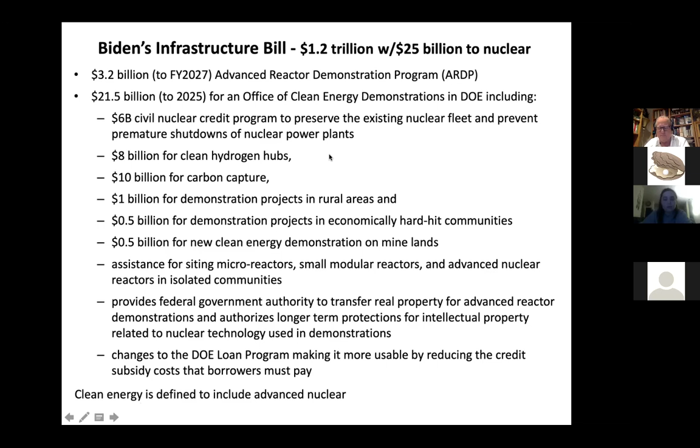So there is a push because all of the leading climate change scientists like Jim Hansen, Kerry Emanuel on down say we will not solve the climate issue at all without a vast expansion of nuclear power. So just forget it. If you're anti-nuke, you're not serious, you're not doing your homework, and you're just listening to nonsense. Because if we don't, then we're screwed. So that's kind of where that stands. Now, the nice thing about this infrastructure bill is that it defines advanced nuclear in the clean energy category. And that's been a fight because the anti-nuclear people do not want nuclear to be categorized as clean, even though it's cleaner than almost anything else.

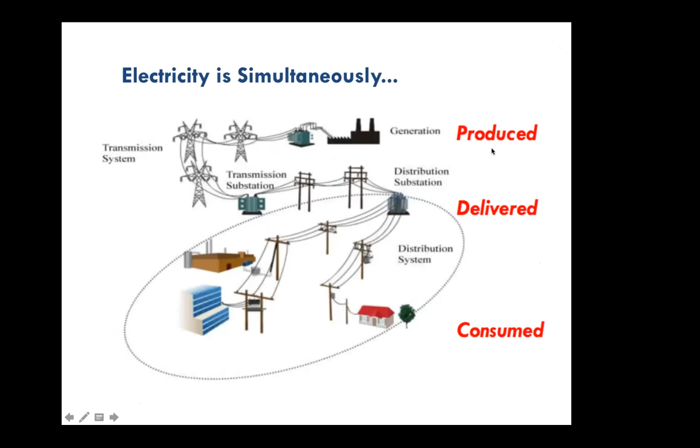Okay, now, in order to have a grid, okay, so we have an electric grid in this country. We have actually several pieces that are slightly connected. Electricity has to be simultaneous. It's produced, it's delivered, and it's consumed. If you produce more than you consume, you start blowing transformers, the big ones, the ones that cost $400 million. If you consume more than you produce, you start having rolling blackouts. So neither of those are good.

And so the grid operators, the independent system operators or the regional transmission operators, like BPA, the Bonneville Power Administration here in Washington State, they constantly monitor the grid and they plan as far ahead in time as they can to make sure this is all simultaneous. Otherwise, they're going to have problems. And we've never had problems in the Pacific Northwest until now, because we have so much hydroelectric. Now, just remember that, it has to be simultaneously balanced at all times.

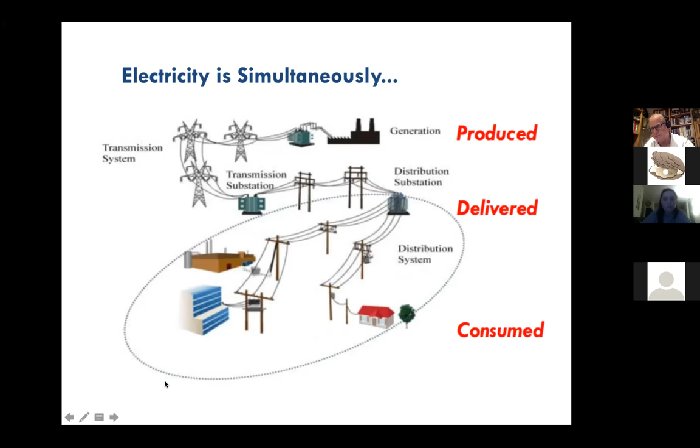Then there's something called a capacity factor. And I'm curious to see how many people know what capacity factor is. Capacity factor is the annual average percent of the maximum output possible that actually is produced, okay? So that means nuclear just doesn't shut down except to refuel every 2 years. So it's a very, very high capacity factor. A 1,200 megawatt nuclear reactor like the one near the Hanford site, Columbia Generating Station, produces 1,207 megawatts 93% of the time. And that's pretty good. You can depend on it.

Natural gas only runs about 56% of the time. And there's reasons for that. It could do more if you wanted to, but it's expensive, contrary to what you think. Coal only runs about 50% of the time. Hydro about 40% of the time, because there's so much demand on the water in the hydro system. It's not just to produce power, it's for flood control, for irrigation, for transportation. So there's a whole bunch of reasons the water is not only producing power in hydro.

Wind is about 35% of the time, but it's very dependent on where you live, where they are. And solar is about 25% of the time. Now, in Eastern Washington, where all these wind turbines have been built in the last several years, the capacity factor is only 27%, in Washington State. In Tornado Alley, in the mid part of the country, where obviously by the name they get a lot of wind, the capacity factor for wind is 45% of the time.

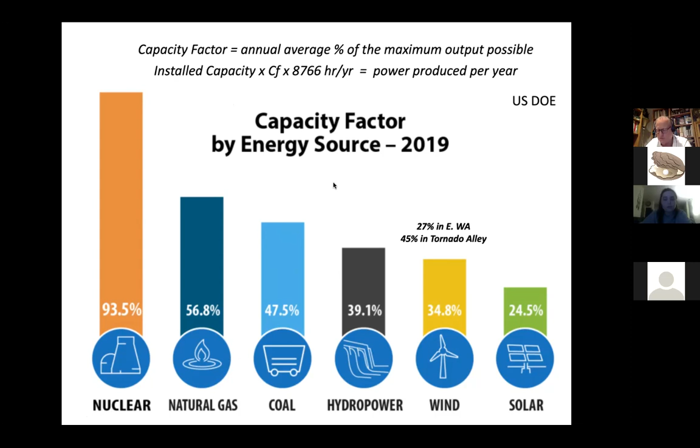Now, if you have the installed capacity, so you build a 1 megawatt wind turbine, then you multiply that by the capacity factor, so 0.348 times 8766 hours per year, and that gives you the amount of power produced per year by that unit. Now, installed capacity doesn't mean very much because you need to know what the capacity factor is. And the amount of power it could produce if the sun shone 24 hours a day or the wind blew 24 hours a day doesn't matter. It only matters what it actually produces per year.

So if you compare something like a 1,000 megawatt nuclear power plant with a capacity factor of over 90%, it produces this much, 8 billion kilowatt hours a year, or 8 million megawatt hours a year. That's just what it does. A little bit more, a little bit less, depending on what's going on that year, but it's pretty much about 8 million megawatt hours a year. Wind, same installed capacity, only produces 2 million. So it's a little under a quarter.

That's important because when you say you're installing 1,000 megawatts, you're not really installing 1,000 megawatts of wind. You're kind of installing 1,000 megawatts of nuclear, but you're only installing 270 megawatts of wind. So when the state legislature or the power companies talk about we need to install 10 gigawatts in the next 5 years, you need to remember you have to multiply that by the capacity factor of whatever you're installing in order to get it right. So remember this, very, very important.

Now, even more important is the lifetime, because nuclear design life is 80 years, not 40. 40 is an arbitrary licensing period. The design life is about 80 years for the generation 2 nukes, about 150 years for the big hydro. Wind is only about 25 years. So if you multiply that yearly production by the lifespan of the unit, you're going to get a real difference. So a 1,000 megawatt nuclear plant is going to produce over 10 times the power of the same installed amount of wind. This is actually quite important.

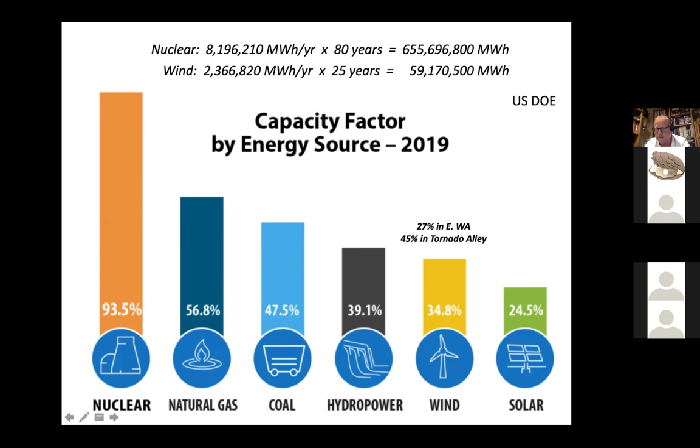And I'm going to use kilowatt hours as a unit because that's what we pay at the end of the month. When the bill comes, we pay for kilowatt hours. And Washington State has almost the cheapest power in the world, 8 cents a kilowatt hour. Now, by comparison, New York right now is 18 cents a kilowatt hour, and Hawaii is 35 cents a kilowatt hour. So again, Washington State is very cheap because of all the hydro we have and this one nuclear plant, and the fact that we are a regulated market. So the energy companies cannot gouge you when things go bad, like they can in Texas and California.

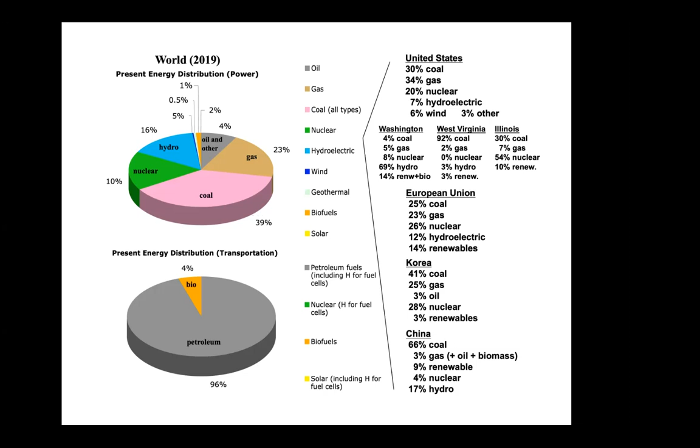Now, China doesn't look like much, 4% nuclear. It's still mainly coal with significant hydro. They are frantically trying to change that. They're breaking ground on a new nuclear power plant every month. Their latest 5-year plan calls for 180 large nuclear power plants, big ones, by 2035. And they probably will do that. They usually stick to their plans. So they are going to dominate the nuclear power world unless we step up. And they will do it because they know they need it.

Now, at the same time, they need so much energy anyway that they're still building coal plants. Okay, modern ones, and they're shutting down the really dirty ones, but they're building more renewables than anyone else, and they're building more hydro. They just need a lot because there's 1.3 billion people, or 1.4 billion people in China, and they need energy, and we'll talk about why.

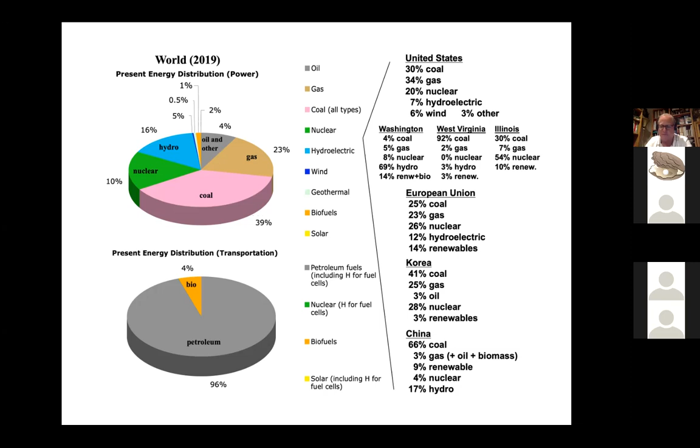However, say we do limit it to something like 34, 35 trillion kilowatt hours a year, that means to get that and to address any of the environmental issues we seem to care about, then almost 20 trillion kilowatt hours of new electricity has to be produced by non-fossil fuel. Now that's more than all of fossil fuel now. Okay, so the numbers are big, and you got to remember the numbers. They matter.

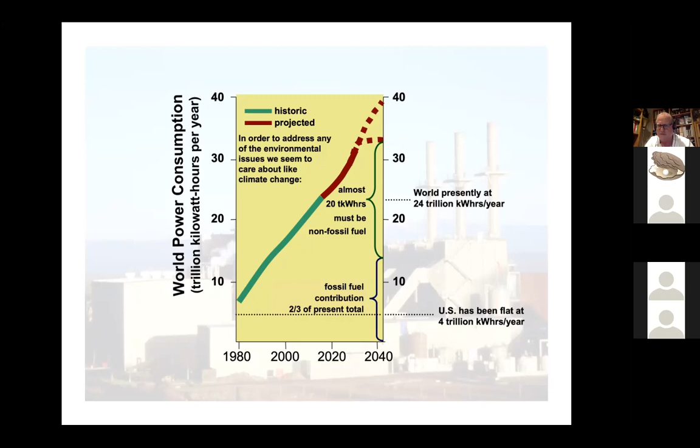Okay, and again, don't talk about percentage. I don't care that wind has increased 50% this year. 50% of what? And 50% of almost zero is still almost zero. You need to say how much power is produced. How many kilowatt hours is it producing? Because that's what counts, not percentage gain. And we'll talk about that.

Now, the reason that curve is so steep is because of these people. 1.2 billion people still have no access to electricity. 80% of them are in South Asia and Sub-Saharan Africa. 2.4 billion people still burn wood and manure as their main source of energy, and 3 billion more people will be born by mid-century. That's a lot of people.

And you might say, well, okay, forget about it. Don't give them energy. We have all we need. We care about the planet and the environment and blah, blah, blah. So don't give them any energy. Well, that's cruel, because it turns out it takes about 3,000 kilowatt hours per person per year to lift someone up out of abject poverty. Remember that number, 3,000 kilowatt hours per person per year, to move them into what we think of as the middle class.

Now, COP21 now, as of last week, is COP26. All the really important discussion is about how to give these people 3,000 kilowatt hours per person per year without giving them coal, and who is going to pay for it. Those are the only two questions that matter. And this is the only way to eradicate global poverty.

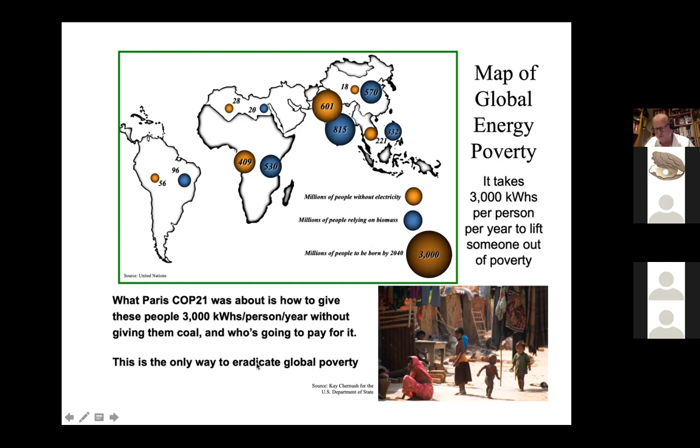Now, that's very, very important, because there's a dynamic tension between the environment and human health. And that's kind of summarized in something called the Human Development Index, the United Nations Human Development Index. So I encourage you to Google UNHDI sometime and look at it. What it says is that access to energy is the first term in the equation of happiness. And that's true, okay? Everything else is secondary.

And it doesn't matter whether you're a 17th century nobleman that was getting the equivalent of 3,000 kilowatt hours per person for him and his family, off the backs of 10 slaves, 10 indentured servants, 4 oxen, and 4 horses. That's a great calculation for the student. You should do it sometime. Or it's everyone listening to me here, which is getting about 12,000 kilowatt hours per person per year off the back of hydro with some nuclear, a little bit of other.

It doesn't matter. You need at least 3,000 kilowatt hours per person per year to have what we consider a good life. So when we look at up here, these groups, the haves, the developed world, if you want to use the right term, we have a lot of energy. And so when we talk about addressing climate change, we talk about moving us down, cutting energy use, becoming more efficient. And we can do that.

Japan, now it's less than 10,000 kilowatt hours per person per year. In 1992 it was 16,000 kilowatt hours per person per year. They have been screaming down, mainly because of technology. And again, technology is great. It's wonderful. The UK is probably the best. They're at about 6,000 kilowatt hours per person per year. I put California as its own country. That should get a laugh. But California is great, but half of it is quite warm.

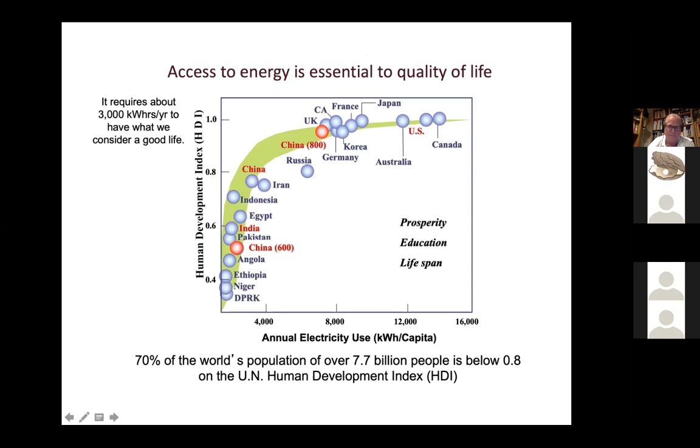Now, we don't all need... there is kind of a sweet spot here, okay? We don't need thousands and tens of thousands of kilowatt hours per year per person. That's a waste. We don't need that. So yeah, we need to bring all these people down, but we need to bring all these people up.

So there is a zone between about 4,000 and 6,000 kilowatt hours per person per year that is the most efficient at eradicating global poverty and its evil stepchildren, war and terrorism. It's the only way to do it. You need to produce enough energy to get everyone up here, and we can cut ourselves down there.

Now, how much is that going to take? Well, it turns out, yeah, the industrialized world, sure, we can cut us down to 6,000 kicking and screaming, but there's only 1 billion people in this subgroup. Now, there's a lot of people at 3,000, keep them there, that's fine. The developing world, the existing developing world, has to increase to 3,000. That's going to take 15 trillion kilowatt hours a year.

And those born by 2040 are going to have to get their own 3,000. So that's 10. So just these two groups alone surpasses what we produce now in all energy for the entire Earth. And so the minimum amount of energy required to eradicate global poverty and get everyone up to a good life is about 33 trillion kilowatt hours.

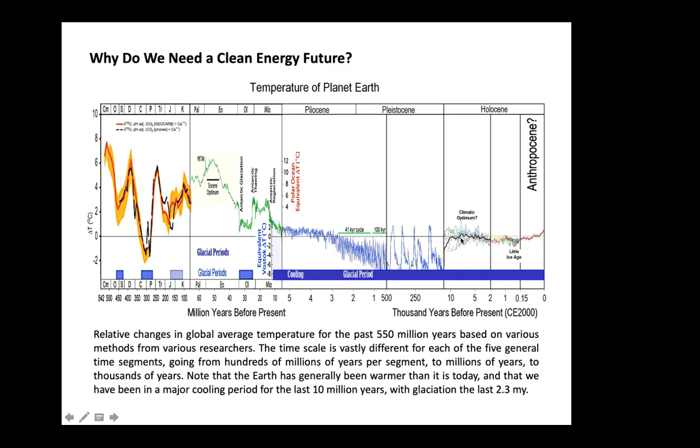If you change too quickly, things die. It's called extinction. It's no big deal unless you're the one being extincted. But that's what happens. It's simply too fast, too quickly, and things die. So that's what's going on more than anything else. It's not the absolute temperature that matters. It's the change in the temperature.

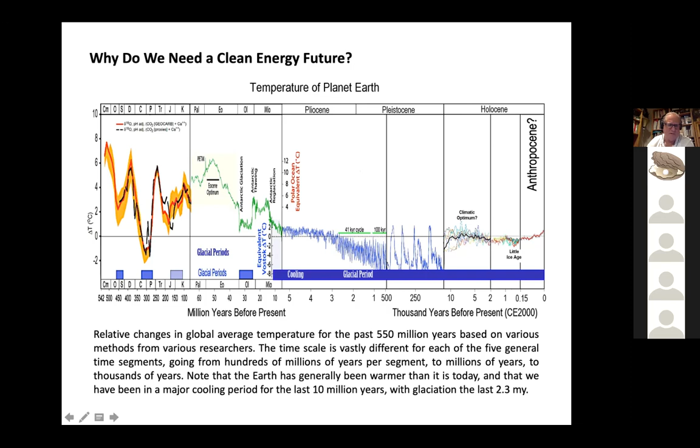So again, all the COP meetings, this recent one in Glasgow and the one in Paris, is about who's going to pay to implement B1. Okay, this is not trivial. The estimates for the cost are in the multiple trillions. So decarbonizing the world is a big lift. We can do it, but it's a big lift.

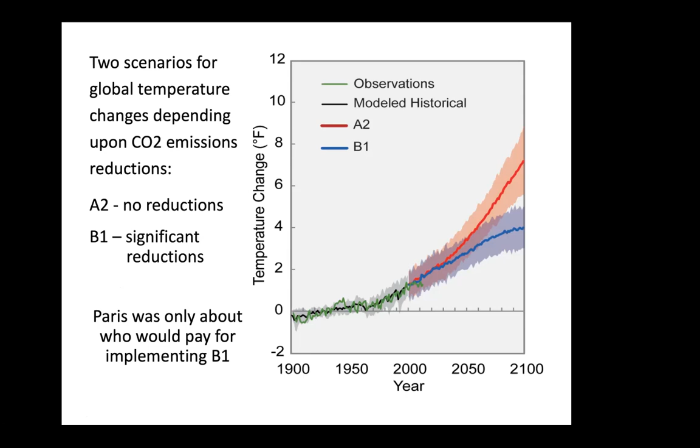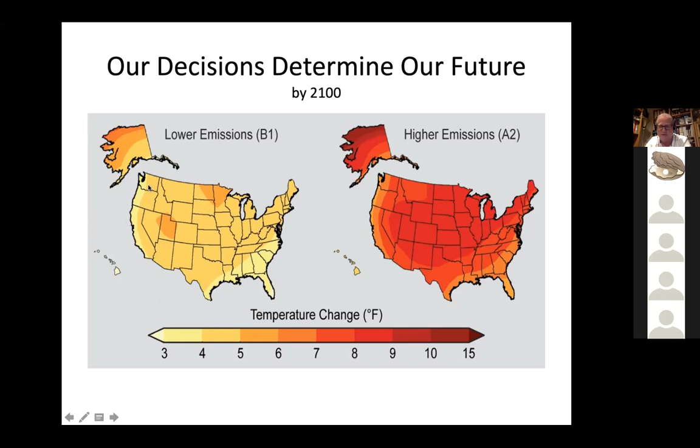So in the United States, I show this map because here's Washington State. So again, if we actually successfully implement B1, we can keep things down to a few degrees. Washington State's pretty good because we're ameliorated by the marine climate, especially you guys over there. If we don't, things get rough.

Now, another thing you probably hear incorrectly is that higher CO2 gives you higher crop yields. That is not correct. Okay, the crop yield, all things being equal, if all you did was increase CO2, the yields would actually go up. But that's not what's going on. The crop yield is generally a function of the peak temperature during the growing season. And as that peak temperature goes up, the yield goes down.

So Washington State, apples and cherries do badly. This is horrible because we are the largest apple and cherry exporter in the world. But grapes and dryland wheat do quite well. So don't worry. Our wine industry is fine. Don't worry. Supposed to get a laugh there. But yeah, so things change. Things change depending on the peak temperature, what happens to it.

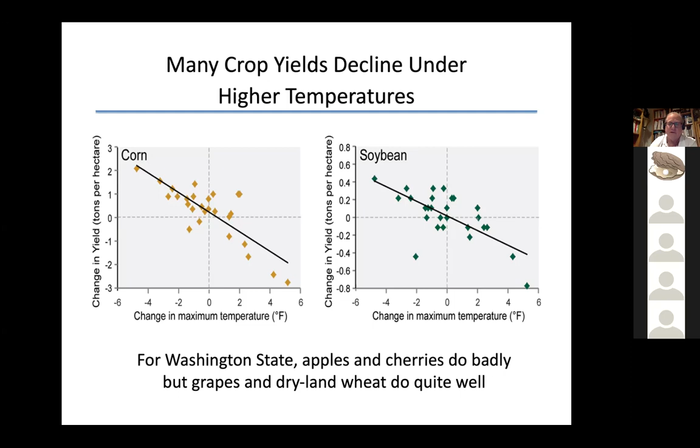So again, growing seasons are changing, growth zones, agricultural zones in the United States have changed 0.5 so far. And of course that's going north. So in 10, 20 years, things that could grow in zone 4 in California will no longer be growing in the same place in California. So we will adapt. We have to adapt, or you die. That's just nature.

Okay, last climate change slide. These are the predictions in order to keep the warming to just 2 degrees C. So to achieve B1 successfully, that level of decarbonization, if we started decreasing global emissions in 2011, we could actually have ended up with a little bit left by mid-century, wouldn't have to fully decarbonize. Well, we blew that one.

But so 2015 comes along. Now we have to actually fully decarbonize at about a rate of 5% a year. Well, we blew that one. So 2020, this used to be in the future. Now it's in the past. We needed to start decarbonizing 9% a year. Global emissions had to decrease 9% a year, reach zero by 2040. That's why everyone always talks about 2040.

Well, I guess the question is, how much are we decarbonizing? How much are global emissions decreasing? Anyone know? Yeah. Anyone know? Yes, you got it. Who was that? Dave. Yeah, they're increasing. Yeah, they're increasing.

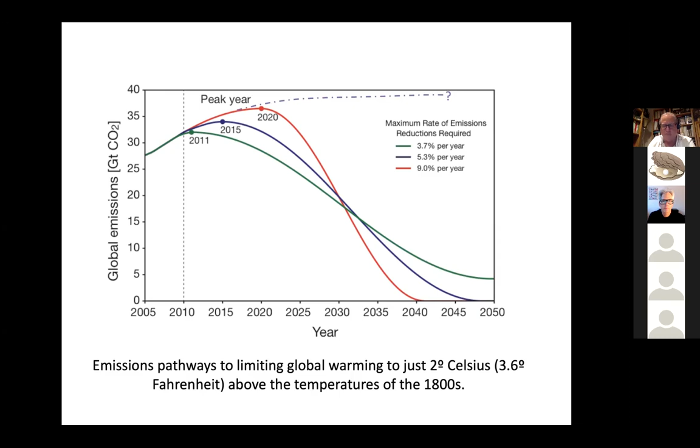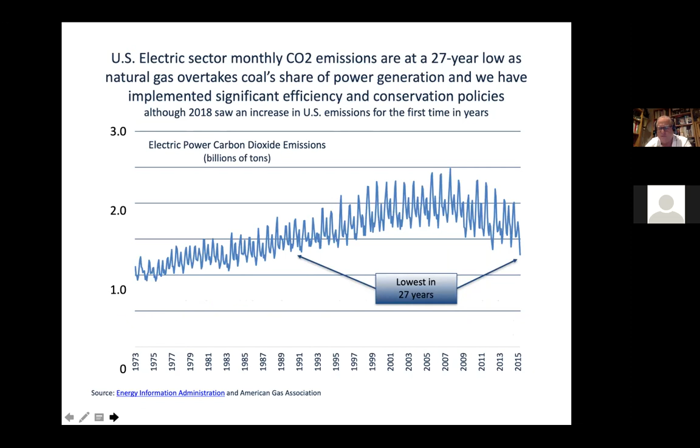And that's because we have so much gas. I mean, as a geologist, I'll tell you, it's just bizarre what fracking has done. Now, prior to 2006, we did not know how to frack very well. And fracking is just hydraulically injecting small particulates into a tight geologic unit in order to keep it open so that you can extract gas or oil from it. And it works incredibly well now. We're getting very good at this.

And so, in fact, we're getting so good, I want to point this out. This is a walking drill rig. Okay. This is a walk. So from a science fiction standpoint, this is fantastic. But from an environmental standpoint, it's horrible because this rig goes down a mile. I'm sorry. It goes down up to 18,000 feet. But it can put 12 stringers out 1 mile.

Now that's incredible. It's not just one drill stem anymore. It's not just one drill hole. You've got 12 stringers off of this one drill rig. And when it's done, it picks itself up and walks to the next site. Okay, this is literally a walking drill rig. So we're getting so good at this, it's very hard to see that we're going to stop it.

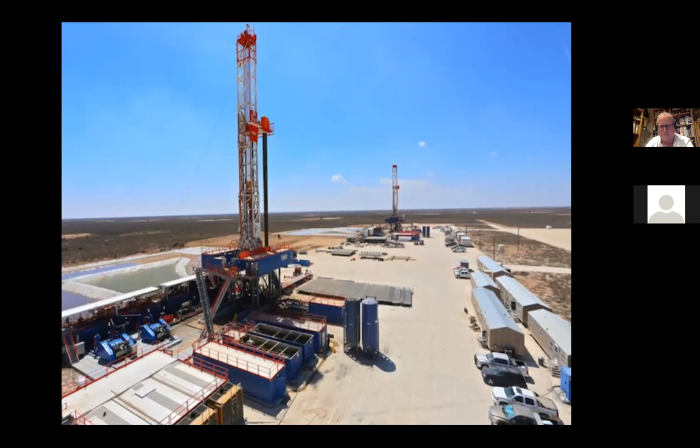So I've set you up for this. What are the fastest growing energy sources in the world? Shout it out. Gas. Anyone else? Oil. Anyone else? Yeah, you're right. Okay, it's the three big ones. Fossil fuel is the fastest growing energy source in the world. Now, I know renewables are coming up, screaming up there. That's amazing. Nuclear and hydro aren't growing too much, but they're still growing.

So the idea that you're not going to increase hydro or nuclear, and you're going to replace these way up here with just renewables, that's insane. It's not going to happen. I mean, it absolutely cannot happen physically. These are still growing, especially oil. So there's no such thing as a free lunch. You really need to understand that. If we're going to get rid of these, you can't pick and choose any of these not to do. You just have to do them all.

So if we just look at, say, wind energy to replace coal and oil, not even gas, that's going to take about 20 million megawatt wind turbines, or about 10 billion tons of steel, 20 billion tons of cement. Now, no one likes to talk about steel because steel is boring. Now, 10 billion tons of steel. What's the global output of steel per year? A little over 1.

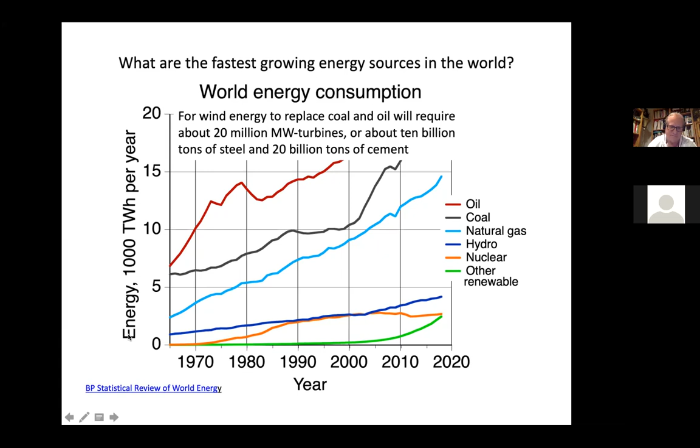Okay, you can play with the numbers all you want, and it's going to depend on a whole bunch of things. But you need to stop building fossil fuel plants. You just got to stop, because once you build a new fossil fuel plant, like a new gas plant, which everyone loves to build in America because gas is so cheap and it's so easy to throw them up quickly in a year, once you build a new one, you've locked yourself into that for at least 40 years. So if you build a gas plant, that gas plant is going to be operating for 40 years.

You can't shut it down after 10 years. The economics, the politics, everything, you just cannot shut down a perfectly good new gas plant just because you said, oh well, now we're gonna decarbonize. You can't do that. So you have to stop building them.

You need to stop closing existing nuclear plants because most of them, almost all of them, have been relicensed for one 20-year period, and they're all safe. They were designed to run at least 80 years. They were only arbitrarily relicensed after 40 and then 20 years after that.

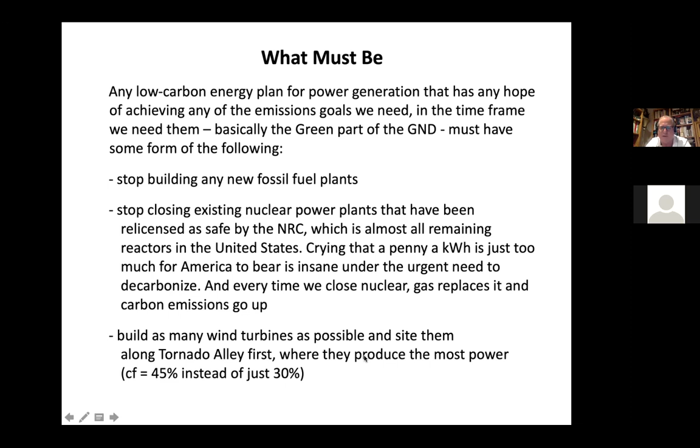So again, stop closing nuclear plants. You need to build more new ones, but you need to stop closing the ones we have because they're very efficient and very good. Build as many wind turbines as possible. That's great, fine, but you need to site them in Tornado Alley, where they produce almost twice as much power as they do here in Washington State. And if you look at Tornado Alley, that's why it's called Tornado Alley. These are the average wind speeds.

So yeah, if you're going to get more bang for your buck, more bang for your ton of steel, you better put them here. And then you need high voltage transmission lines. Okay, we can do those. But building them where it's green is just dumb.

What about offshore? We've been hearing a lot about offshore. Yeah, offshore, expensive and difficult. That's fine. We can do as many as we want. But again, when you start putting them offshore, the public doesn't like it. Okay, so the amount of public opposition to new wind is actually quite large when you start putting it in your backyard. This is this NIMBY thing, not in my backyard stuff. Everyone wants stuff, but they don't want it in their backyard. Well, sorry. You need to make some sacrifices if you care to do this.

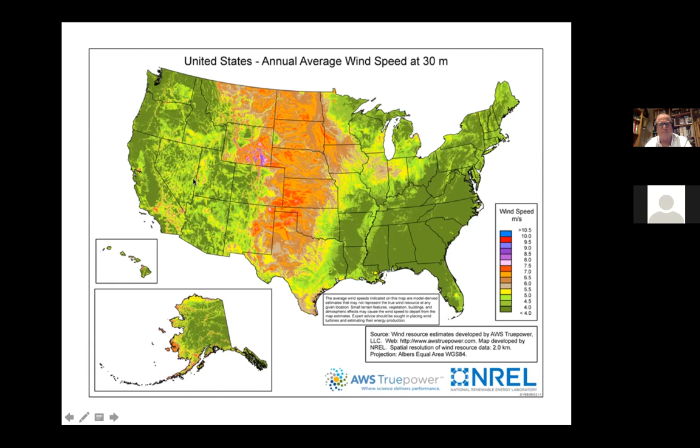But without a doubt, Tornado Alley is the best place to put them, and that's why these states have jumped so much with wind. I mean, Iowa, this side of the state is almost 50% wind, and that's great because they get a lot of capacity out of it. So again, that's kind of tricky.

And the reason you want to put them into Tornado Alley and not Washington State is that here is the amount of steel and concrete, cubic meter of concrete, which is a couple of tons, mass of steel, metric ton per megawatt. This is what it takes. So wind is 10 times more material intensive. And it also goes for things like copper and neodymium and everything else that wind turbines need. But just steel alone and concrete, you need 10 times as much per megawatt as you do for anything else.

Now, solar takes a lot of steel, but not much concrete. Hydro takes a lot of concrete, not much steel. Coal, the thermal units don't take much at all. And gas takes almost nothing. That's why you can throw a gas plant up in a year. It just doesn't take any steel or concrete. It's incredible. And that's why state legislatures love them, because you don't have to wait 5 years, 10 years. You can just throw them up in 12 months once you get them sited and licensed.

So this is important. A very mundane issue, materials, but it's really important when you get to renewables, especially wind. We just don't have the steel or the concrete to do it. And so that's why when I showed the emissions per source, that's why wind was as high as it is, because it's all about concrete.

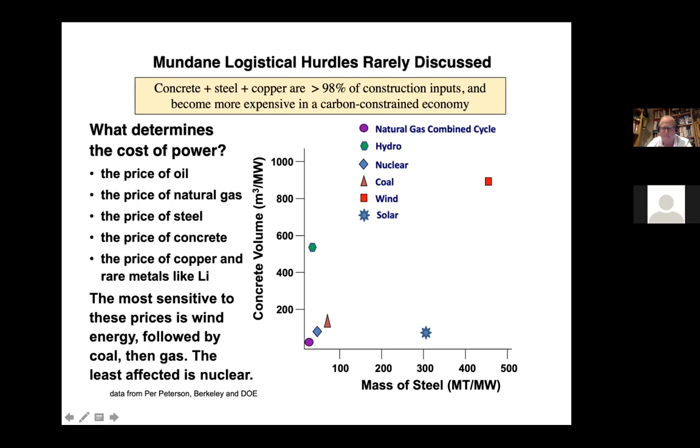Okay, and the same thing with rooftop. So put rooftop solar on all new buildings. I have it on mine, it's great. You amortize it along with the mortgage, you won't even feel it. And on many existing buildings. But again, you need to put them on in areas that average at least 200 sunny days a year, where you get capacity factors of 35% instead of 20%.

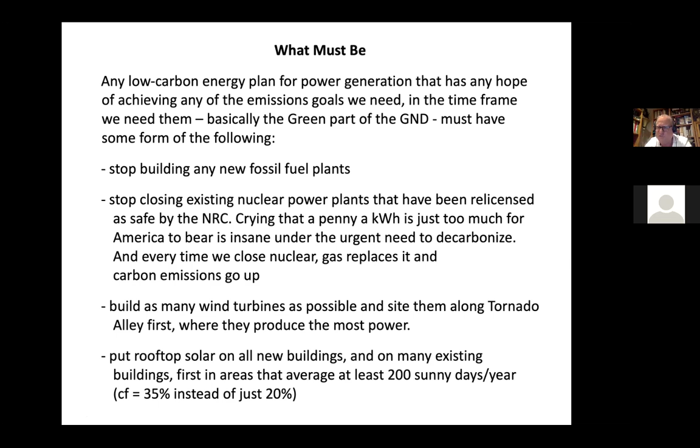My solar panels only have a capacity factor of 10%. That's terrible. I mean, it's horrible. I like it. I wanted some street cred on renewables, but that's not very efficient. Not a very efficient use of the materials that go into producing PV cells. Where are you located? Hanford, Washington, so Richland. Yeah, we have 300 sunny days a year, but we're far north. We're up here, actually in this green to yellow transition zone. You really want to put it down here.

You don't want to put PV cells in Maine. That's another dumb thing to do, because you're not going to get much energy out of it, and we don't have the materials to waste in putting them just anywhere. The problem is everyone puts them where they're going to get subsidies, right? It's all about money. So we don't have a plan, and I'm not sure the infrastructure bill is going to give us a plan. It just gives us money to do things. But the plan is, where do you do this? You have to coordinate where you're building your new systems in order to get the maximum amount of power out of them.

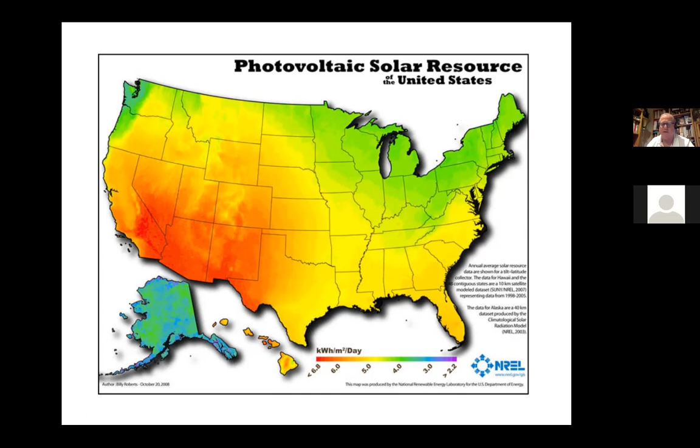And then we need small modular reactors because they're small. Now, this is kind of funny. The public likes the idea of small. They don't know at all what it means, but they like the idea of small, that it's safer. And it is insofar as when you shrink the core down so far, the surface area to volume ratio changes so much that you can bleed off heat faster than it can build up and melt down. So it's actually quite nice. If you look at NuScale's design, which I think I have here. Hold on a second.

I mean, TerraPower's Natrium sodium fast reactor, that's got a lot of support right now. It's still quite a far distance from reality. It's also very good at backing up intermittent sources like wind, which most SMRs are. Then X-energy's is a pebble bed reactor, basically a high temperature gas-cooled reactor. And it can integrate into large regional electricity systems, and it can serve as base load or load-follow renewables. Same thing with NuScale.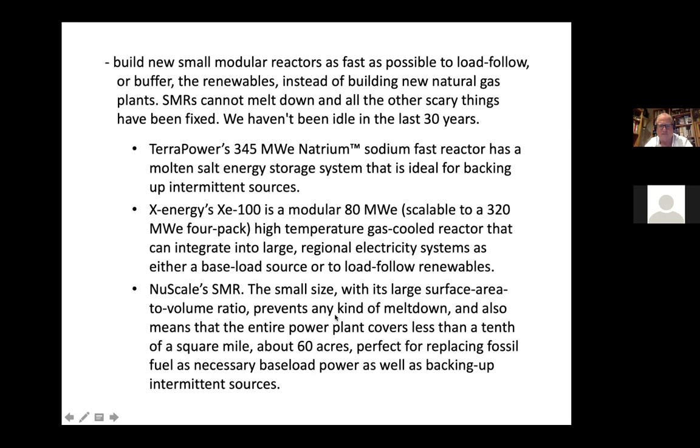And the power plant itself and the emergency evacuation zone is nothing. It's basically the fence around the plant, as opposed to 50 miles away that you have to do for existing nukes, and that gets everyone scared, and that's one of the big issues. But again, NuScale is very good at backing up intermittent sources on any time scale, minutes, hours, and days. So if we look at TerraPower's design, again, I don't.

Question real quick. Yes, sorry, go ahead. How does the size correlate with its ability to prevent meltdowns? I will go over that. But again, the surface area to volume ratio is such that it can bleed off heat at a much faster rate than a normal reactor, and so you can't melt down. Now, all of these new SMRs, the core is below ground. The soil surface is up about here for TerraPower. So you have a geothermal heat sink as well, and that helps. So I'll go over that.

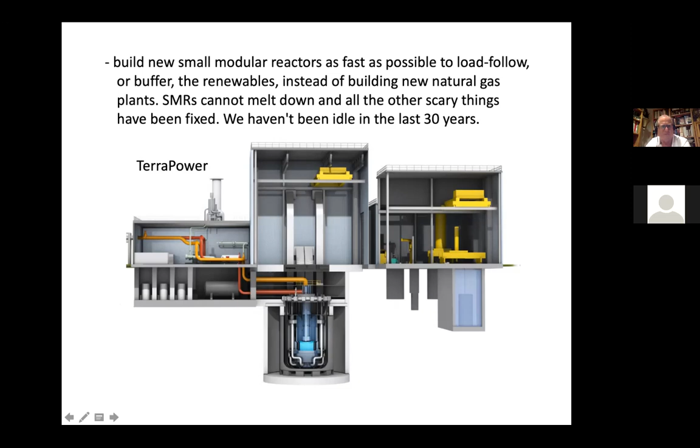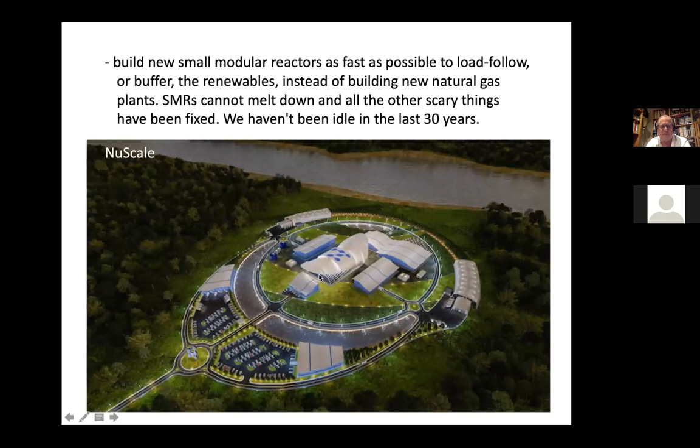So this is TerraPower's design. X-energy again is a pebble bed reactor, so the pebbles can't melt down. They're too small. Essentially, they don't build up enough heat, and their construction and materials are such that they can't melt down. NuScale's design is, let me just go. Okay, so here's the core in NuScale. Again, it's a traditional light water uranium reactor at about 5% enrichment.

So if all power goes out, you have no external water, no external power, no pumps, then the decay heat for the first day is dealt with by the existing water. For the next few days to a month, the residual heat boils off that water. By that time, because it's so small, it's cooled off enough that it bleeds off heat into the surrounding soil faster than it can build up. So you can never get to the point where it can melt down, because the surface area to volume ratio is so different.

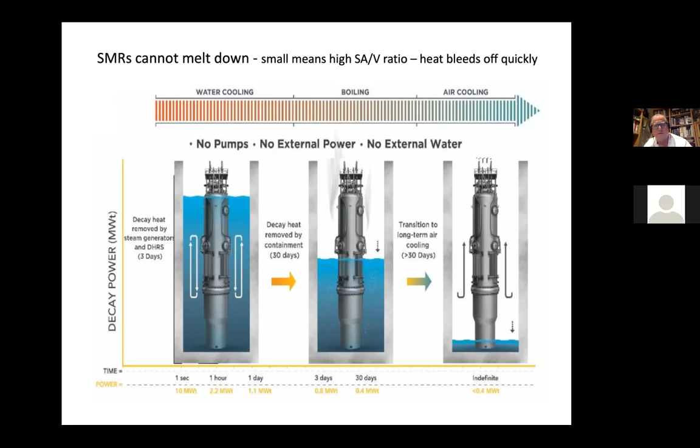Now, the nuclear navy essentially has been doing small modular reactors for 70 years. They've had no problems with it. Russia had a problem because they used a fast reactor and they didn't understand polonium leakage out of penetrations, but that's a whole other story. So again, build them as fast as possible.

The National Hydropower Association and the Department of Energy have a very good plan to double hydropower without building a single new dam. The reason we can do that, it turns out only 3% of our dams generate electricity, and you can electrify almost all the rest.

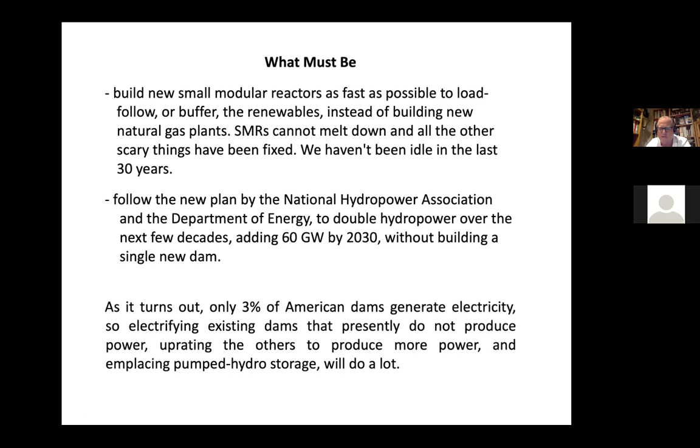So here's the non-powered dams in America that could be electrified, could generate power, and this is their various size. Some of these can be very significant. We could double the hydropower capacity in America just without building a single new dam. And that's nice because these dams already have EIS associated with them.

Would that take a lot of steel or concrete? Concrete, yes, but it's still good, because hydro emission is, I can't remember exactly, but it's about 20 tons of CO2 per gigawatt-hour. So again, it's not bad. It's not as bad as solar. It's a little worse than wind and nuclear, but it's still very low. You're at double digits, not triple digits like fossil fuel. So you could do that.

And the people already living near them are used to having a dam there. So again, the public outcry would not be very large just to electrify existing dams. This is a key thing we could do.

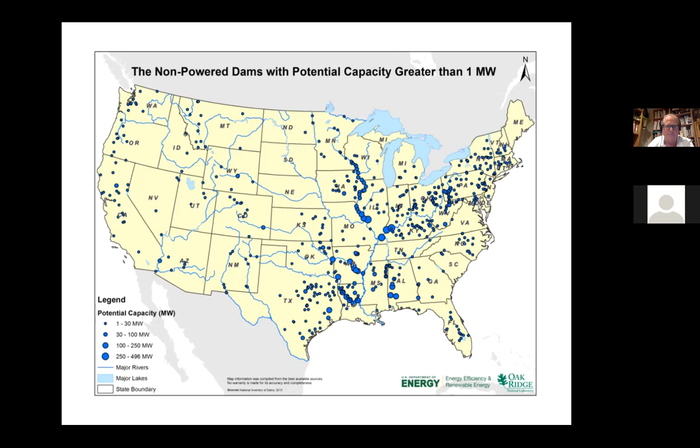Now, in the Pacific Northwest, I want to mention why wind is basically useless here. This is a load graph from Bonneville Power Administration, the main system operator in the Pacific Northwest. Red is the load, so this is what's being drawn, the consumption that everyone in the Pacific Northwest is doing. We get up in the morning and start firing things up. Things cool off during lunch, then they fire up again, and then we go to bed. So this is the load curve of a normal week.

Blue is the production from hydroelectric. As you can see, it just follows the load curve. Hydro is what does our heavy work in the Pacific Northwest, and it follows the load. Now brown is thermal, so that's the single coal-fired power plant left in Centralia, a couple of gas plants, and the nuclear plant. They basically just tool along. They almost never go down unless there's a huge spike, and it goes down a little bit, but it's pretty much constant.

And then green is wind. We have 7,100 megawatt capacity of wind in Washington State. So when it starts blowing, you get this huge surge in power. And as I mentioned, consumption and production and delivery have to be balanced precisely. So hydro has to come down really fast. We just have to stop, let the water flow over the dam and forget about it. No power. So all wind is doing is displacing hydro.

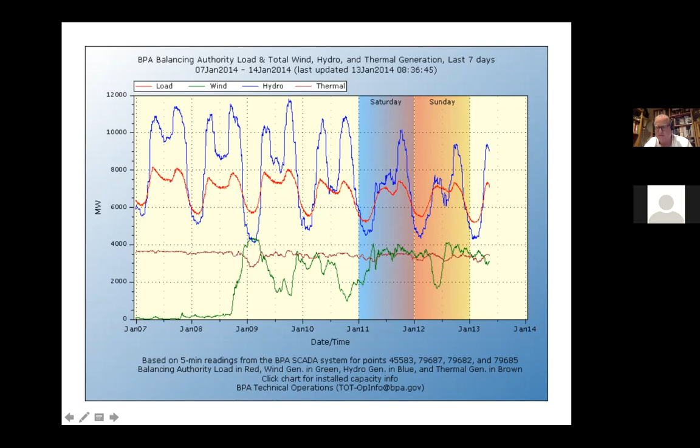Wind, you just need to have it in a windy place, and solar in a sunny place. That's easy. Nuclear can go anywhere. It's not weather dependent at all. So again, you need to balance this and decide where you want things to go to maximize their output for the money, because this is expensive.

Now, if you read the latest E3 Northwest Resource Adequacy Study, they found that over the last several years, we have 7,100 megawatts of wind, but it was only providing 7% of that when we needed it. On the really bad days, the very coldest days, the very warmest days, you don't get much because wind does not blow on really cold and really warm days.

And so one of the problems is that if you're going to be placing a lot of wind anywhere in America, when you really need it, it's not going to give you anything. It's fine when you don't need it and it produces a lot of power. Okay, fine, that's great. But when you really need it, it won't. And that's what caused the blackouts in Texas and California this last year. Cold in Texas and warm in California.

They just couldn't depend on any of the wind that they installed. And they installed a ton of wind over the last 5 years in both of those places. And it did not produce when they needed it. That's the problem. And their gas couldn't come up fast enough because they didn't have enough gas supply, not enough pipelines.

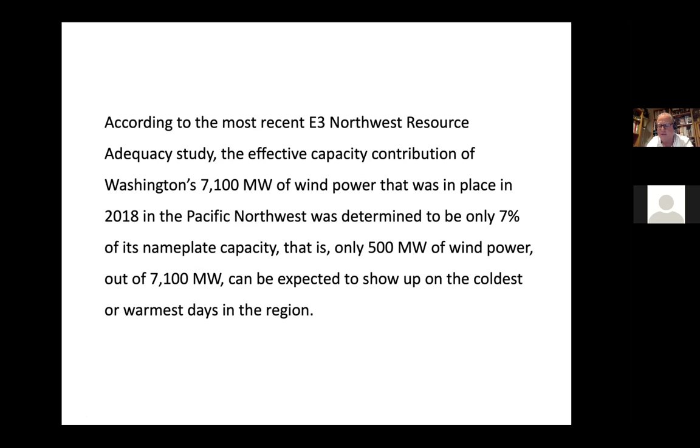Okay, another thing you need to do is secure sources of the materials, like I mentioned, iron, but cobalt, lithium. You're not going to build enough batteries for fully electric vehicles or for anything else if you don't have these metals, and we don't have enough of these metals. And the United States doesn't produce almost anything in this. We used to, but we closed them all down because China undercut the entire world.

So it's kind of a boring issue, where we're going to get the lithium, where we get the cobalt, but it's essential. I mean, absolutely essential. Because in America, we need to build at least 150 million fully electric vehicles to make any dent in oil consumption. And we need at least 100,000 charging stations in order to service a national fleet.

And then we need to streamline the process to site and approve high voltage transmission lines. Okay, people don't like high voltage transmission lines. They say they want renewables, and then they vote down any attempt to put high voltage transmission lines. You're not going to get anything out of renewables if you do not have the high voltage transmission lines to transmit that energy to where it is needed.

So we're building wind turbines in Eastern Washington and down the gorge. Hold on a second. And down the gorge, yet Seattle is the real need for that power. And so if you don't have high voltage transmission lines to get there, you won't get anything. And so again, it's very strange.

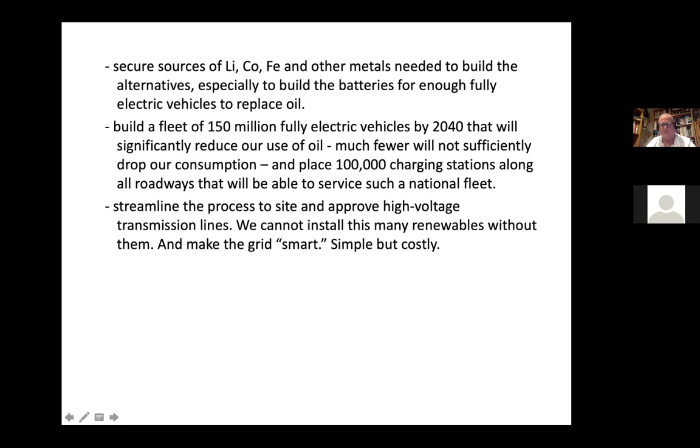Now, when you look at high voltage transmission lines, we usually think of AC, right? That was Edison versus Westinghouse. But it turns out high voltage DC lines are much more efficient, and they even cost less over longer distances. So we have only built one large high voltage transmission line in the last 20 years. It was the DC line from Texas to Tennessee.

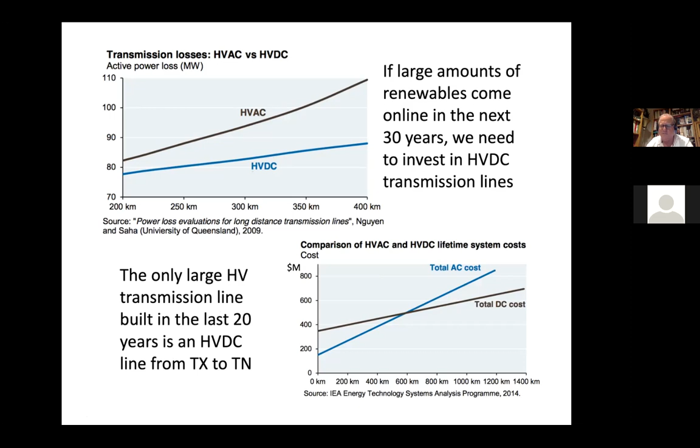So again, we are having problems because we're not coordinated. So if you're going to build a bunch of renewables, you better build a bunch of transmission lines, and the public votes them down every time we try. So this is one of those weird things. They don't understand that you need these if you're going to have renewables.

So in America, this low carbon plan will require, and again, you can play with these numbers all you want, you can move them around, but on the order of 500,000 new megawatts of wind, 200,000 new megawatts of nuclear, 300,000 new megawatts of solar, and 120,000 new megawatts of hydro. If you do this and all the associated issues related to them, then you can replace fossil fuel. And this provides enough electricity for a fully electric fleet of engines.

So, but how long to do this? I need 200,000 new megawatts of nuclear. That's not going to come online very quickly. We're going to have to start real fast and go real quickly. Same thing with wind and solar. I mean, we haven't produced anywhere near this, okay, a fraction of this so far. And 2040 is looming.

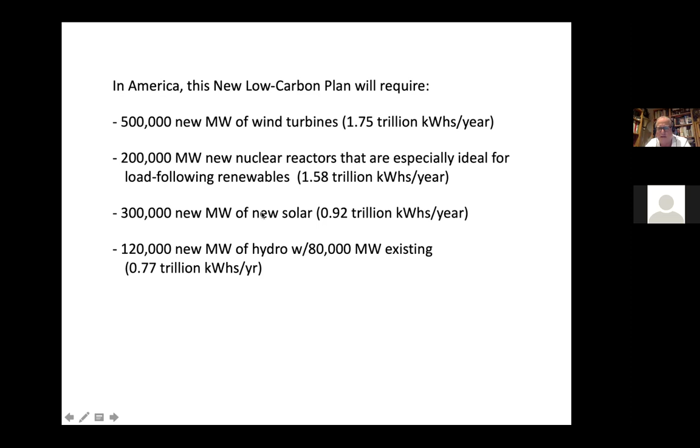Now for the world, it's even worse. You're going to have to come up with 4 million new megawatts of wind turbines, 1.4 million new megawatts of nuclear, 2.2 million new megawatts of solar, and 1.1 million new megawatts of hydro, given that the existing 300,000 megawatts keep running.

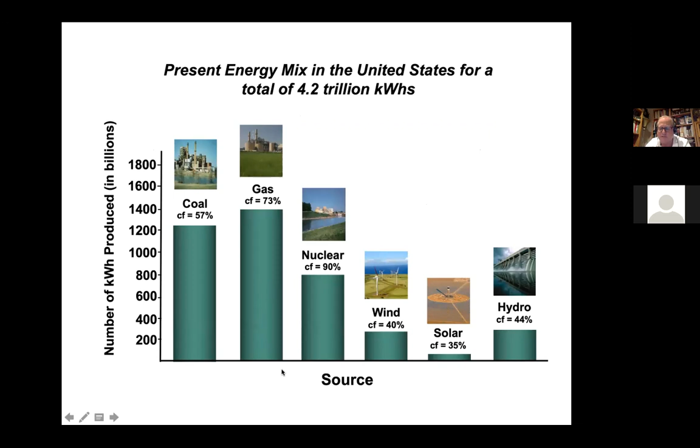So what we have to do in America is go from this, which is our present mix. Oops. Stop it, Jim. Go from this to this, right? This to this. And this is going to take about 500 million tons of steel just in America. And we don't produce even 100 million tons a year. So that's a big deal.

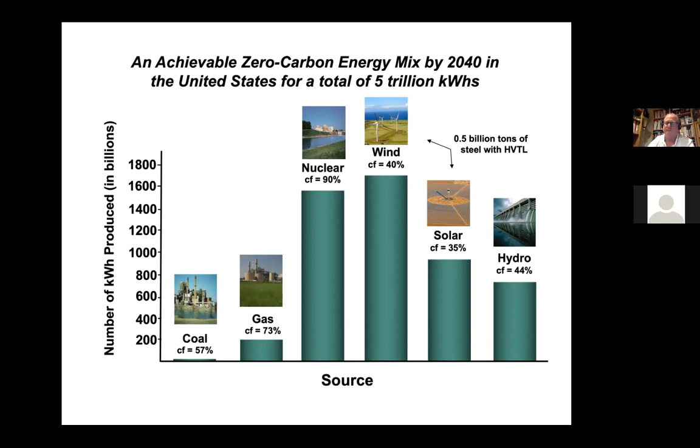Now, again, the American Society of Civil Engineers has said that by 2025, our infrastructure problems will cost our economy $7 trillion. That is not a trivial amount of money. So this $1.2 trillion infrastructure bill will barely address this, but it's a good start. There's no question about it. Now, fortunately, the energy sector is only about 300 billion of that. So we can deal with the energy infrastructure problems well.

And if you look at the age of our capacity, so this is all of the installed capacity, all sources, it's getting old. These are mainly old coal and old hydro plants like Grand Coulee Dam, that kind of stuff. Most of the things that we built 10 to 50 years ago. And most of the new stuff is renewables and gas. Nuclear is right in the middle, anywhere from 10 to 50 years old, and it's split evenly. So again, the infrastructure is old. We got to replace it. Almost all of it, except the big dams and some of the nuclear.

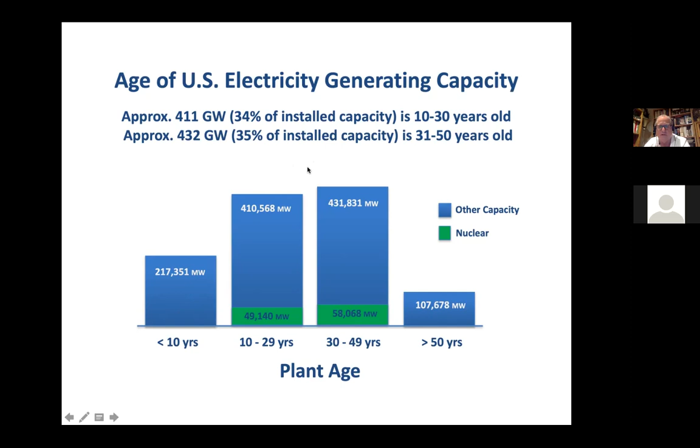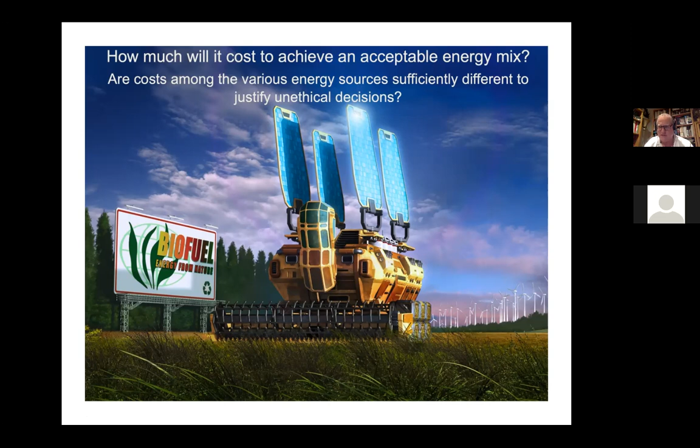Now, what's it going to cost to achieve this mix? And keep in mind, is the difference in cost sufficient to justify unethical decisions? So, okay, I know this is America. You got to make a buck. I get it. But do you have to become filthy rich at the expense of the environment and everything else? No. If it's just a penny or two a kilowatt hour difference, whereas the regional changes in cost are 10 to 20 cents a kilowatt hour, then that's okay. We got to pay for this, right? It's not cheap to decarbonize, and this is part of the cost. So what's it going to cost?

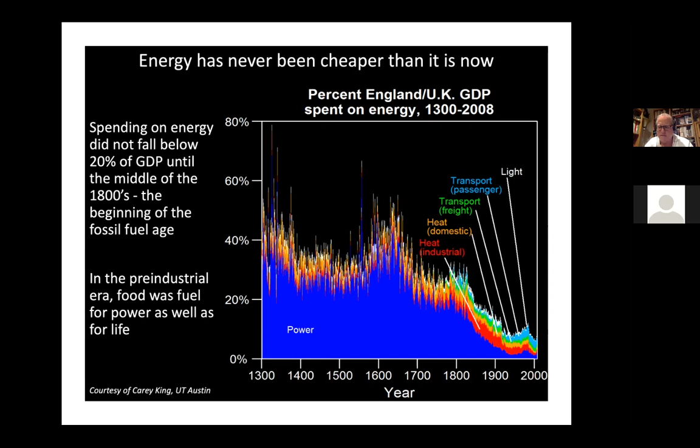Yeah, Dave. Quick question about that. Does the cost of nuclear power generation include the cost of waste disposal? Yes, absolutely. Now, these others do not. Nuclear is the only one that actually pays for its waste. The Nuclear Waste Fund is enough to cover all nuclear waste disposal as long as we put it in the right rock. And that's another talk. It's not Yucca Mountain. We need to actually put it where WIPP is. We can easily pay for it with the money already in the Nuclear Waste Fund. So nuclear is forced to, and that's a good thing, pay for its own waste. The others don't. And wind and solar is becoming a problem because their waste is also pretty nasty, and they don't have to pay for it. So it's just kind of weird.

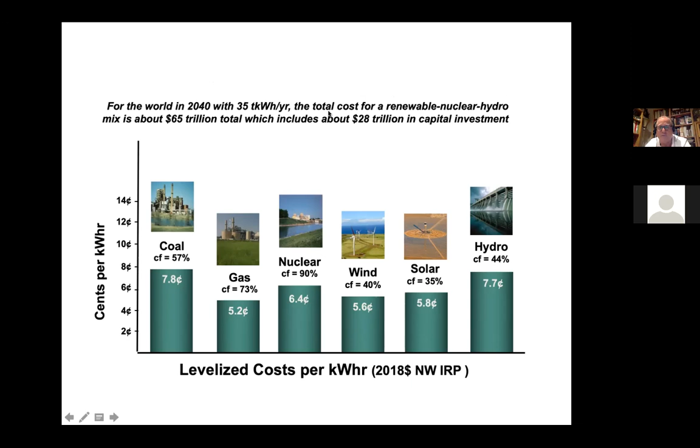Now, the levelized cost of energy nonsense doesn't include a bunch of indirect costs. And so when everyone uses those numbers to compare nuclear and gas or nuclear and wind, they're not accounting for half of the cost. So things like California has so much solar and wind that they have gas turbines on idle, just waiting for when the sun goes down, they have to kick on. Well, you have to pay for those gas plants to idle, and they're not cheap. Okay, but no one ever adds that cost in.

Well, there was this study that was done by IHS Markit that did that, and sure, right now for existing nuclear, it's 4.5 cents a kilowatt hour. For new nuclear, it's 6.9 cents a kilowatt hour. But for wind, it's 8.9 and 9.8.

Now, one of the problems with subsidies, taxpayer subsidies, is that it doesn't reduce the cost. It just shifts that cost from the ratepayers to the taxpayers. So the people at the end of the month that get their energy bill, they don't see that, okay? Their tax dollars go to it, but no one knows where the tax money goes anyway. So it's kind of hidden. But it's still being paid for. Okay, someone's going to pay for it. At the end of the day, this costs money. And where do you want it to come out? Do you want it to come out of the ratepayers, or do you want it to come out of the taxpayers?

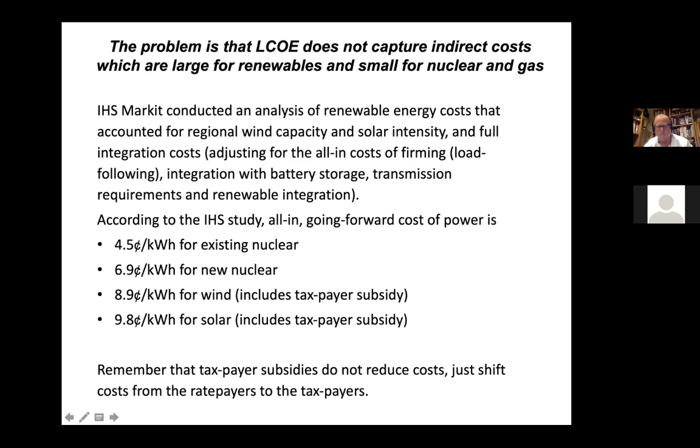Then there's the indirect costs, the externalities. I don't know if you know that term. It just means someone's paying for this. It's not coming at the end of the month in your bill, but someone's paying for it. Polar bears, your grandchildren, whatever, someone's paying for this. And it's not usually something that is captured in any cost analysis.

So the two things we usually do is we talk about the physical footprint, the area in square miles. So each little blue square is what it takes to produce 1 billion kilowatt hours per year from each of these energy sources. And then we talk about CO2 emissions. Now, CO2 emissions is kind of a proxy for everything, for pollution of many sorts, mining and all that kind of thing. But it's all captured in a CO2 per kilowatt hour. So each little brown square is 4 grams of CO2 per kilowatt hour produced.

Oh, and also I put in the change in cost if we put a $15 per ton carbon tax. Now, 15 per ton is probably not enough to make any difference. Berkeley actually did a study that showed, if it's not $40 per ton up to $100 per ton, it won't really make much difference, but that's okay.

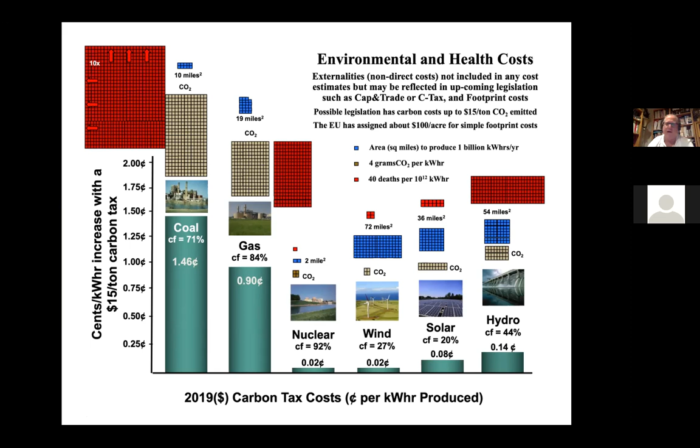Now, if you look at the actual numbers, here's the mortality rate, deaths per trillion kilowatt hours produced. For coal, global average 100,000. China, of course, has been very bad. But 5 years ago, this number was 250,000. So they're getting better. Now in the United States, we only kill 10,000. That should get a laugh. That's not good. It's better than the world, but it's not good.

But oil, same kind of thing. Now these are all particulate, pollution-related deaths, air quality deaths, things like that. Biomass, the World Health Organization just put out that biomass is a health epidemic in third world countries and developing nations. So this is not good for biomass. Basically, it's a ventilation problem.

But then you get down to here, and these are simply accidents, okay? And you notice I have a global average and a US average. So for coal, hydro, and nuclear, I have a US average versus a global average. And now why is the US so much better?

Shout it out, anyone wants to. Regulations? Yes, regulation. So the reason coal kills so few people here is because of the Clean Air Act. Now, the Clean Air Act is arguably the single piece of legislation that saved the most lives in the history of the world. Okay, there's a little debate whether it was the 1932 Labor Act or whatever, but still, the Clean Air Act is absolutely wonderful. That's why this is only 10,000.

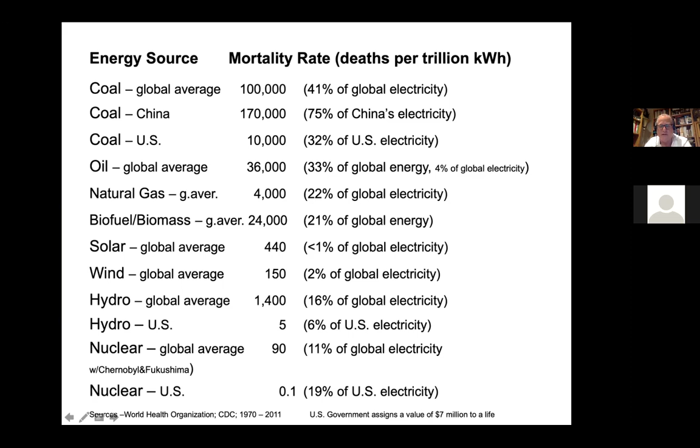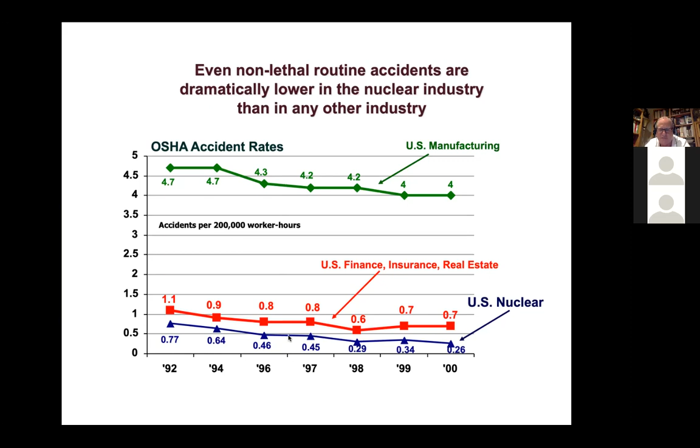So why are we so afraid of energy? Simpsons. Yes. Yeah, we told you to be. Sorry, my bad. But yeah, we've been saying how dangerous it is with no data backing it up for decades, because ideologically it seems bad. All you have to do is mention nuclear and mushroom clouds appear in the brain. And so it's really hard to talk against that with a bunch of data, because data is boring. But in the end, we need to know this. And we're not very good at communicating that.

Okay. The real reason, of course, is we have incorrect but intentional association with nuclear weapons. The whole idea of the Cold War was to scare everyone about nuclear, and it worked. It worked. We kind of lost the not so subtle difference between energy and weapons. Inaccurate, purposefully simplistic modeling.

I don't know if you've talked about the linear no threshold dose hypothesis, that every photon of energy is going to kill you kind of thing. It's stupid. It's not true. But we adopted that as our regulatory guide in 1959, the whole world, and it's wrong. So it makes everyone afraid of radiation when they shouldn't be. It takes a huge amount of radiation to do anything. And it's very hard to get that.

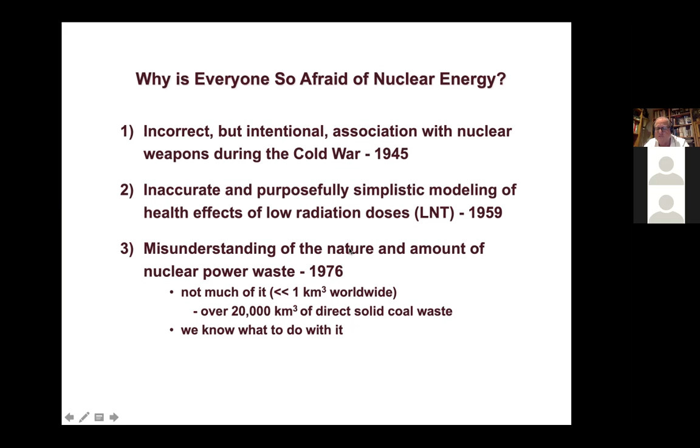And then, of course, misunderstanding of the nature and the amount of nuclear waste. There's not much of it. All the nuclear waste in the world ever produced could fit in one decent landfill. That's it. But solid coal waste, wow, produces it every year. And we know what to do with nuclear waste, as I mentioned. We're just not allowed to. Thank you. I hope that was useful.

Wow, that was amazing. Oh, good. Thanks. You guys want to give a virtual round of applause for Dr. Conca? That was so cool. Oh, good. Thank you so much. That's good. It's great stuff. I mean, it really is the subject. I know we're way past time, but do we have an opportunity for a few questions?

Sure. So you've made an incredibly compelling case for nuclear. And so I have two questions. They're related. The most compelling argument I've heard against it is the difficulty of quickly enough ramping up nuclear. We did it in the 70s. So I'm curious. With the right political will and the right amount of money, could we? How long would it take? And then associated with that, and this is my more pertinent question.

So you've persuaded me as a citizen, as a teacher, that we ought to move in the direction of increasing our nuclear capacity. What should individuals and activists do to encourage and to create the political and social will to move in the direction of nuclear? Right.